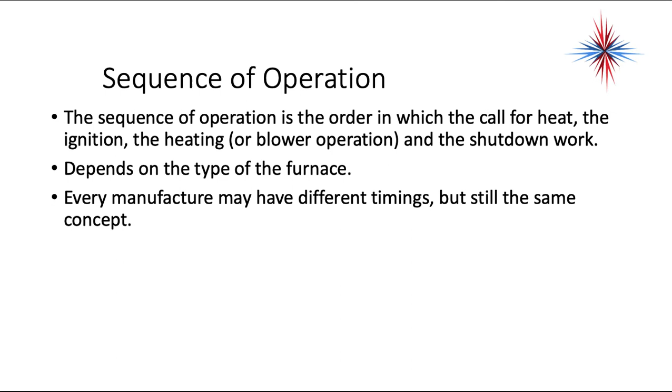Why do we care about this? Because if you don't know how the furnace is supposed to be operating, there is absolutely no way you can troubleshoot the furnace and find out what's going on. The sequence of operation is the order in which the call for heat, the ignition, the heating or blower operation, and the shutdown all work. It depends on the type of the furnace, and every manufacturer may have some different timings, but it still follows the same pattern. So let's start off with the easiest and simplest type of furnace.

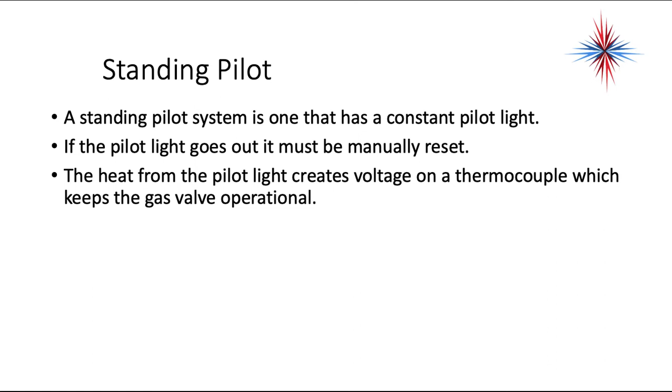It's the standing pilot. A standing pilot system is one that has a constant pilot light. If the pilot light goes out, it has to be manually reset and lit. The heat from the pilot light creates voltage on a thermocouple, which keeps the gas valve operational. So when we're talking about the sequence in here, we're assuming the pilot light is lit. Okay, if the pilot light is not lit, none of this is going to work.

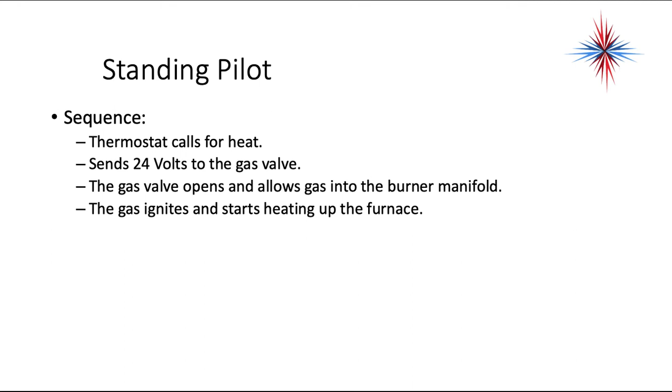So the thermostat calls for heat. It sends 24 volts to the gas valve. The gas valve opens and allows gas into the burner manifold. The gas ignites and starts heating up the furnace. The furnace heats up to the fan cut-in point, usually on the combo fan limit switch, and the fan control turns on the blower. This provides heat to the space.

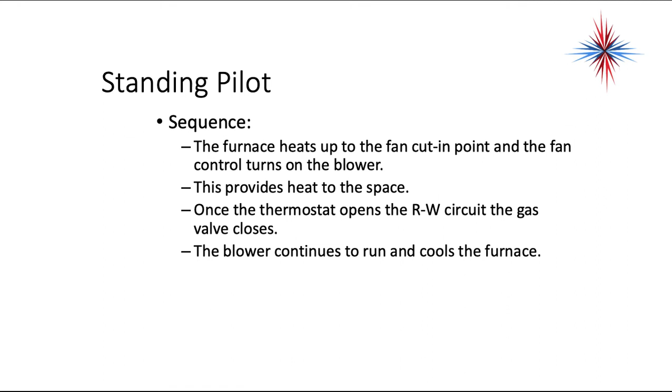Once the thermostat opens the RW circuit, the gas valve closes. The blower continues to run and cools the furnace. Once the temperature of the furnace has dropped, the fan control opens and the blower shuts down. If the high limit opens any place in this sequence, the gas valve shuts down and the blower continues to run. This is critical. If the high limit opens, the gas valve shuts down, but the blower will continue to run. That's a critical troubleshooting item.

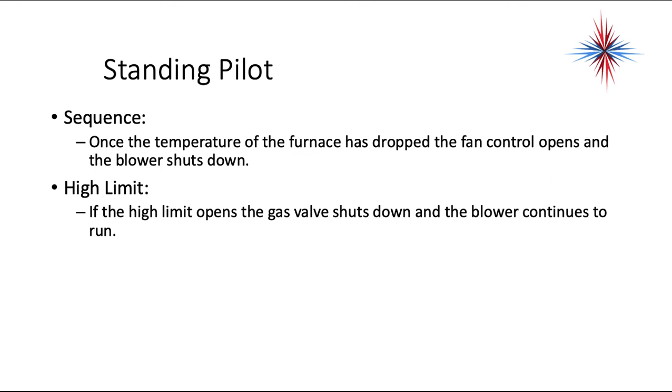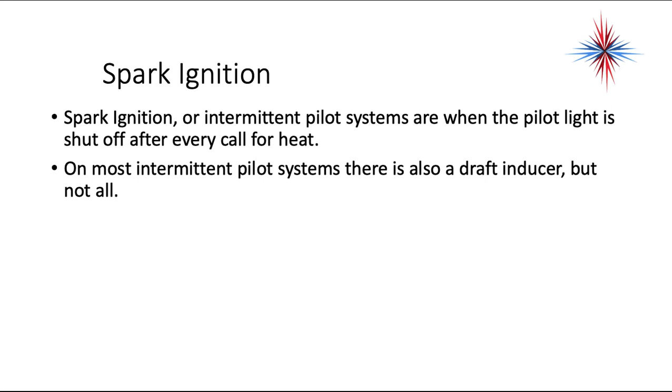The next type of furnace is the spark ignition furnace. Spark ignition or intermittent pilot systems are when the pilot light is shut off after every call for heat. On most intermittent pilot systems, there's also a draft inducer, but not all of them. So we have the atmospheric burner type.

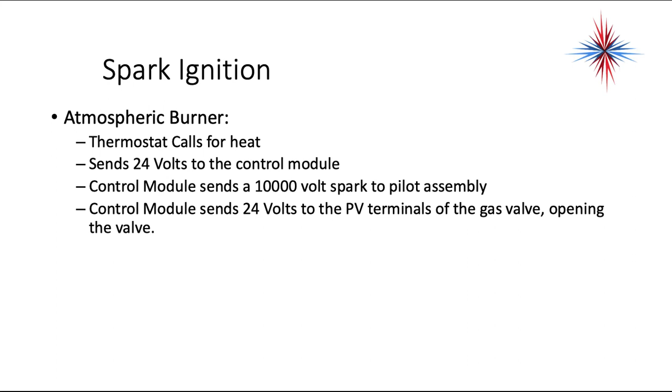That's a non-draft inducer. Okay, the thermostat calls for heat. It sends 24 volts to the control module. The control module sends a 10,000 volt spark to the pilot assembly. The control module sends 24 volts to the PV terminals of the gas valve, opening the pilot valve. PV, pilot valve. Pilot ignites and heats up the pilot sensor, creating a DC current for flame rectification. Once the control module senses flame, it sends 24 volts to the MV terminal of the gas valve, opening the main valve.

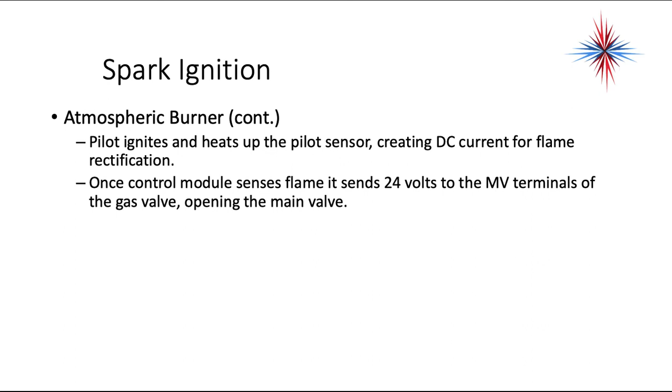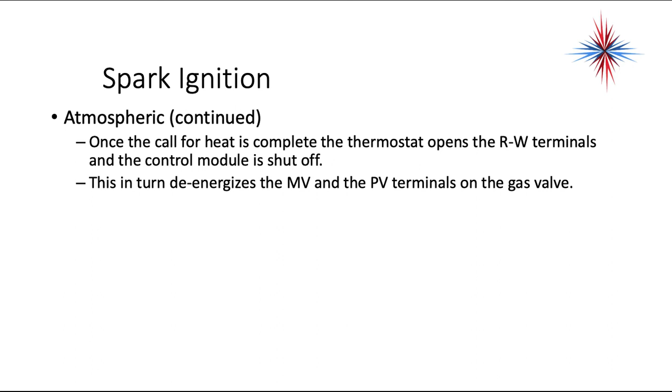Once the call for heat is complete, the thermostat opens the RW terminals and the control module is shut off. This in turn de-energizes the MV and the PV terminals on the gas valve.

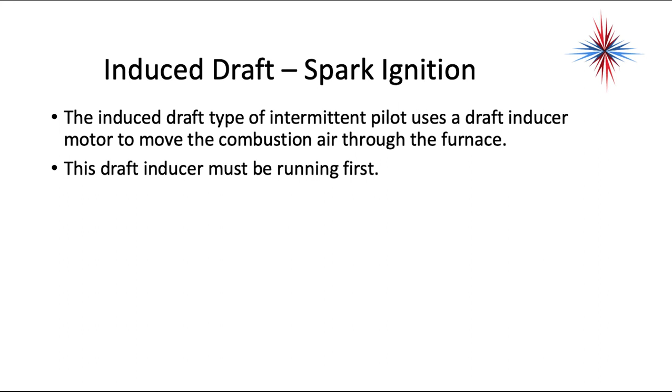The next type is the induced draft. Okay, now this type has a draft inducer that has to be running before the call for heat can continue. Okay, this uses a draft inducer motor to move the combustion air through the furnace.

The thermostat calls for heat, sends 24 volts to the draft inducer relay, which closes and turns on the draft inducer motor. The draft inducer motor starts and closes a low pressure switch, which proves draft. The low pressure switch allows 24 volts to go to the control module.

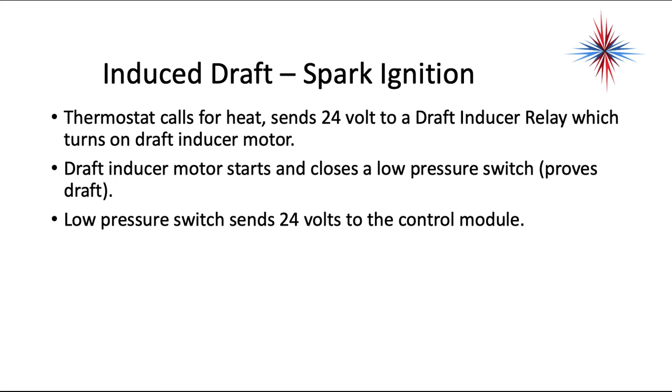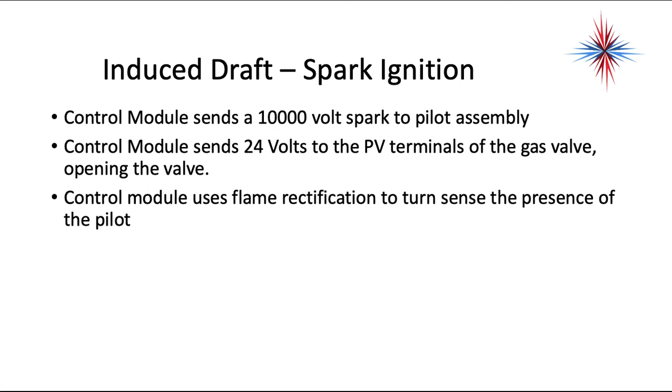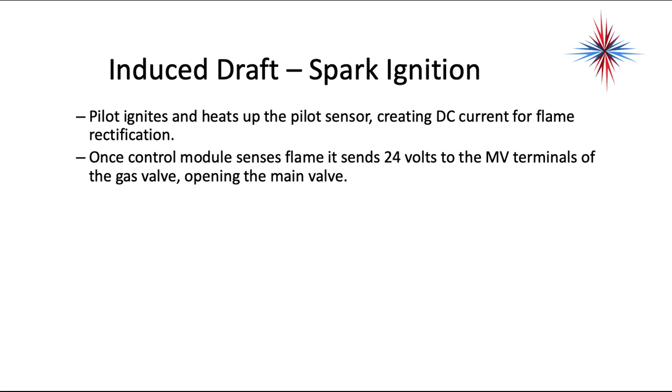The control module sends a 10,000 volt spark to the pilot assembly, and also sends 24 volts to the PV terminal of the gas valve. The control module uses flame rectification to sense the presence of the pilot. The pilot ignites and heats up a pilot sensor, creating DC current for flame rectification. Once the control module senses flame, it sends 24 volts to the MV terminals of the gas valve, opening the main valve.

Once the call for heat is complete, the thermostat opens the RW terminal and the draft inducer motor shuts off. The pressure switch opens and breaks the current flow to the 24 volt control module and gas valve. This in turn de-energizes the MV and the PV terminal on the gas valve.

Okay, now here's a critical thing. If you're ever asked or have to follow a draft-induced system through, the thermostat controls the draft inducer. It does not directly control the ignition module. We have to turn on the draft inducer first. The pressure switch controls the ignition module. Something important to remember.

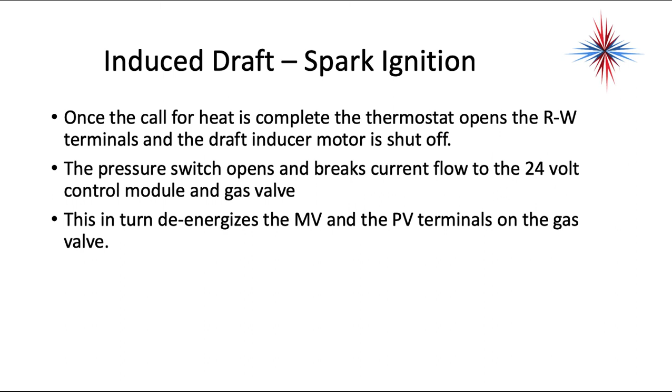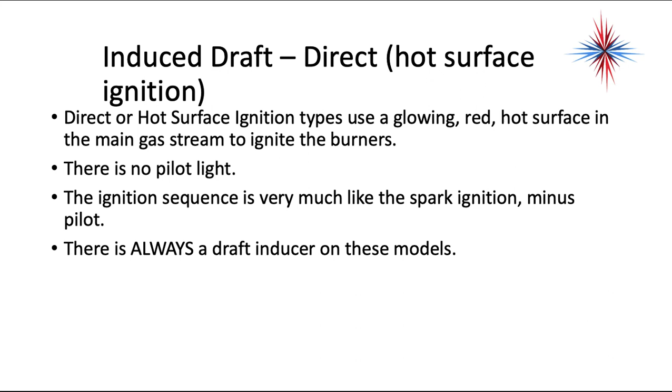The next type is the draft-induced hot surface ignition. The direct hot surface ignition type furnace uses a glowing red hot surface in the main gas stream to ignite the burners. There is no pilot light. The ignition sequence is very much like the spark ignition minus the pilot. There is always a draft inducer on these models of furnaces, so you don't have these without a draft inducer.

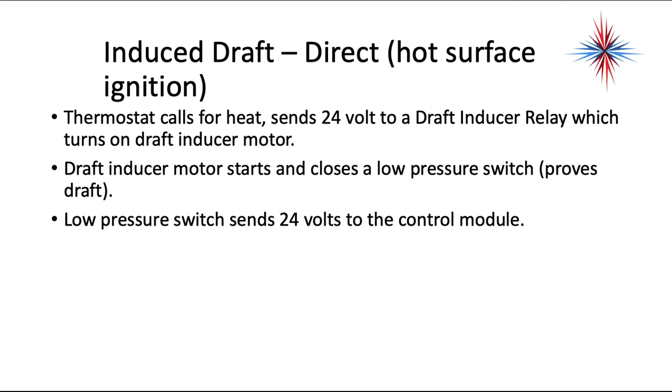The thermostat calls for heat. It sends 24 volts to the draft inducer relay, which turns on the draft inducer motor. The draft inducer motor starts and closes a low pressure switch which proves draft. The low pressure switch sends 24 volts to the control module. The control module sends 120 volts to the hot surface igniter, causing it to heat up and glow. This takes around 90 to 120 seconds.

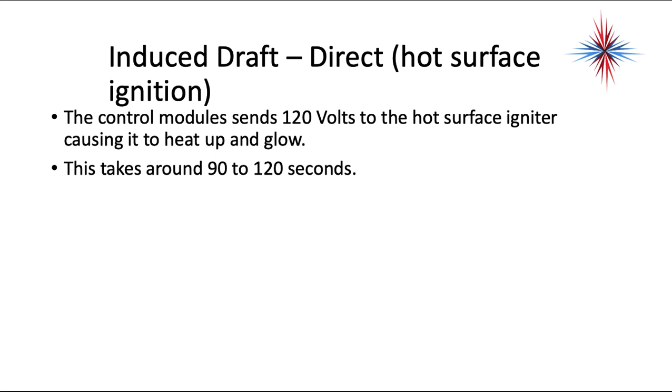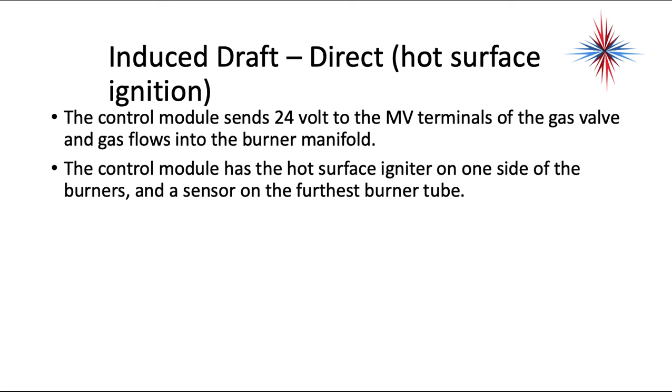The control module then sends 24 volts to the MV terminal, that's main valve, of the gas valve, and gas flows into the burner manifold. The control module has the hot surface igniter on one side of the burners and a sensor on the furthest burner tube. So we need to make sure that all of the burner tubes have ignited. Once the gas ignites, the flame sensor on the other side senses this flame through flame rectification, shuts down the hot surface igniter, and keeps the main valve open.

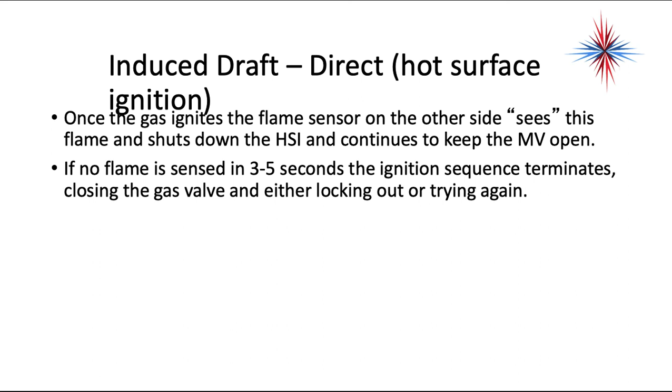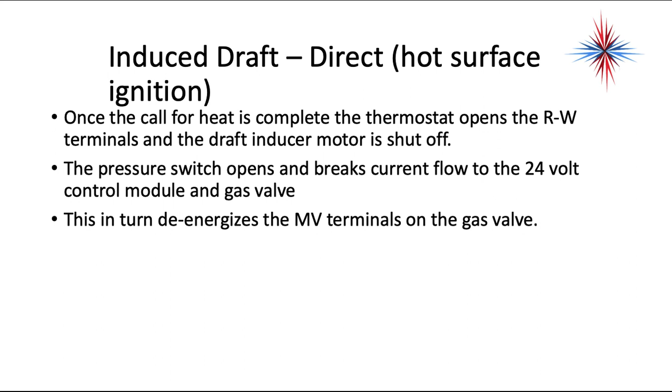If no flame is sensed in 3 to 5 seconds, the ignition sequence terminates, closing the gas valve and either locking out or trying again. And again, there are going to be pre- and post-purge cycles throughout this whole thing. Once the call for heat is complete, the thermostat opens the RW terminals and the draft inducer motor is shut off. The pressure switch opens and breaks the current flow to the 24-volt control module and gas valve. This in turn de-energizes the MV terminals on the gas valve.